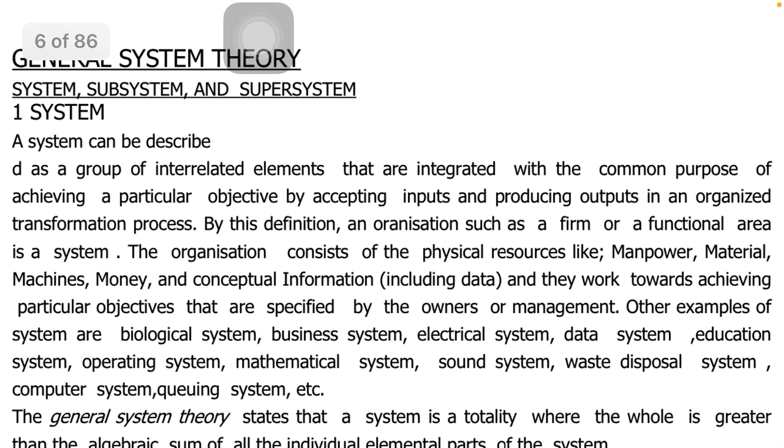Management Information System. We are talking about system here, so let's talk about the general system theory. We have types of system. I will describe them as we go on. We have systems, we have subsystems, and we have super system.

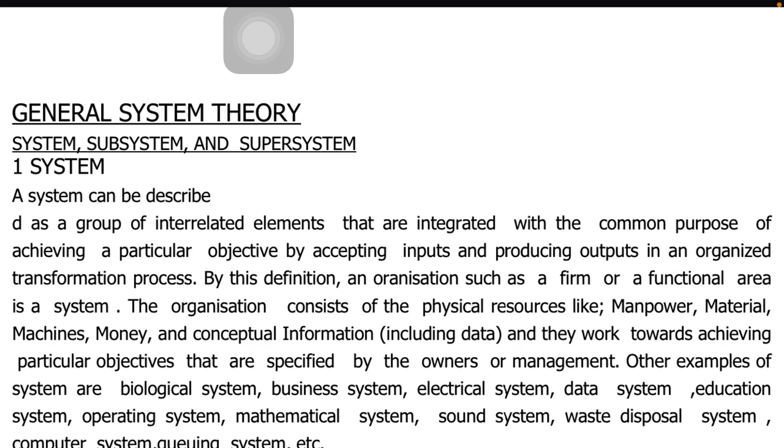System can be described as a group of interrelated elements that are integrated together with the common purpose of achieving a particular objective by accepting inputs and producing outputs in an organized transformation process. That means the input is worked on, processed, transformed, then the result is outputted.

Now, by definition, let me help you. A system is when you gather some elements together to work together to achieve a common goal.

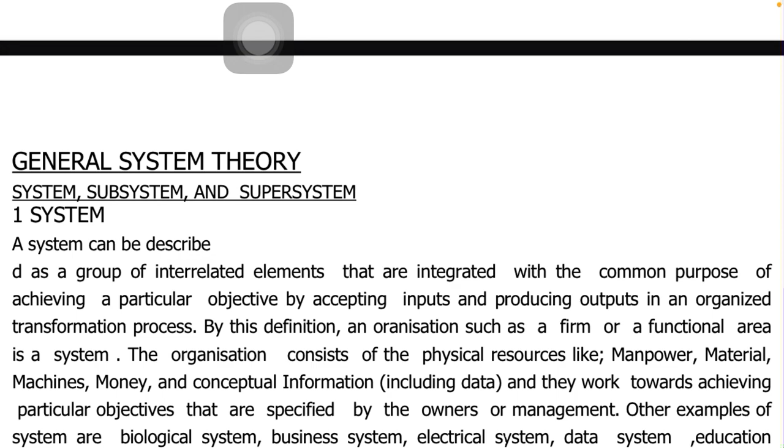A system, like an organization, can be called a system. A firm is a system consisting of physical resources like manpower, material, machines, money, and conceptual information. They work towards achieving a particular objective, cooperating together. That's a system. Each of the departments working together.

This one works on the information. This one has his own input on the information. This one checks the information. This one processes the information. This one presents the information. That's a system. All those departments, all those parts, all those elements working together.

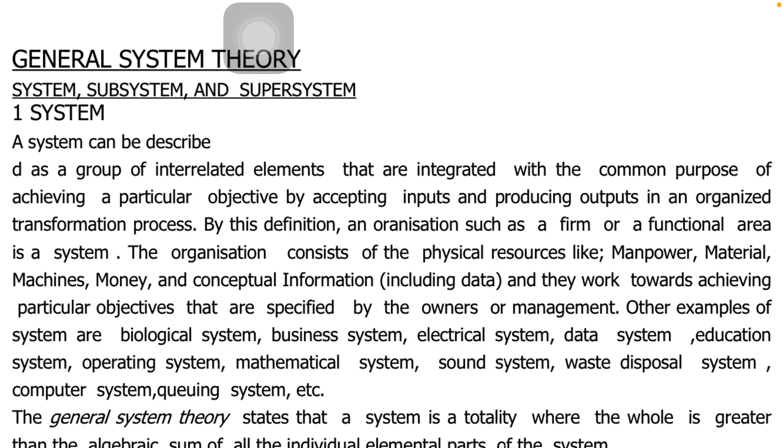Now we have types or examples of systems. We have biological system, business system, electrical system, data system, education system. We have operating system, mathematics system, sound system, waste disposal system. We have computer system and queuing system, among many other.

The general system theory states that a system is a totality where the whole is greater than the algebraic sum of all the individual elemental parts of the system. You understand that? A system is a totality, and the whole is greater than the algebraic sum of all the individual elements of that system. So individually you add them together, they are not still as good enough, but when they work as one, then they are the best.

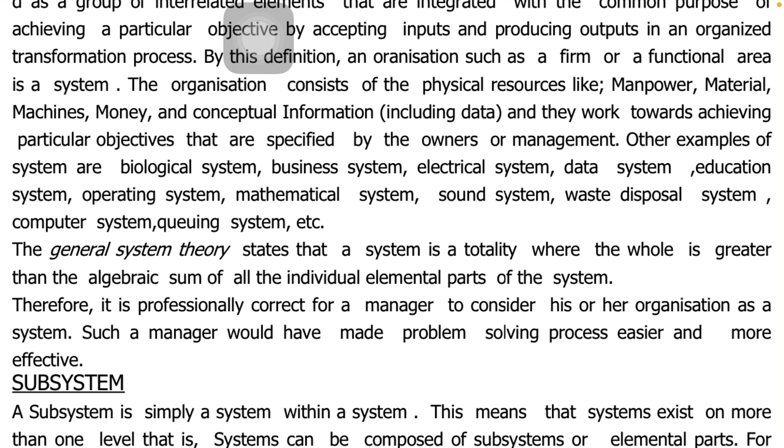Therefore, it is professionally correct for a manager to consider his or her organization as a system. Yes, consider it as a system, because a system is greater than the sum of all the elements in the system. It has more result, better result. So work as a system. Consider your organization as a system if you want the best result.

Now, such a manager will have made problem-solving process easier and more effective.

Let's go to subsystem. We have talked about system. Just briefly, a subsystem is a system inside a system. A subsystem is a system itself, but it exists inside another system. It has its own specific goal.

Say, this is what I want to achieve. It achieves it, and it gives the result. But there's another system that picks its result and uses its own result. So a system working for another system, a system inside a system, that's a subsystem.

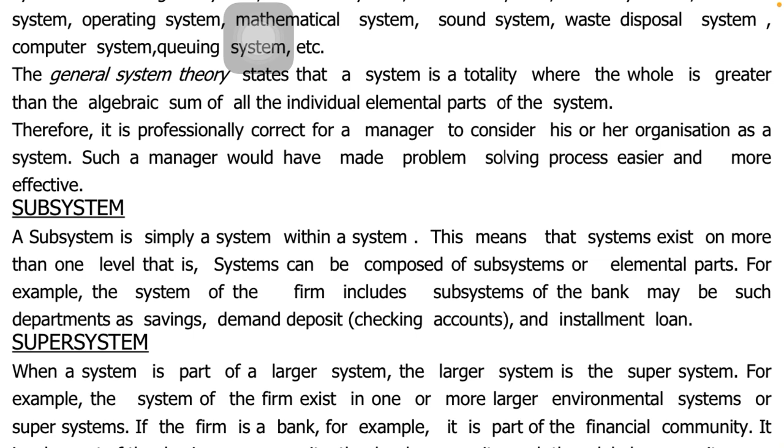Now a super system, you can read it through, please. A super system is a system that has a system inside it. This one has a subsystem inside it. Yes, a super system is the system that makes other systems work for it.

I would like you to give me examples. When you mention subsystem, give me examples. You describe super system, give me examples. You describe system itself, give me examples.

Now, basic element of systems. A basic configuration of system consists of the following elements. When you're talking about a system, you have need of input. There will be input element. There will be transformation process, and there will be output element. Yes, there will be input to that system, and there will be transformation processing in that system to give a result, and the result will be brought out as an output.

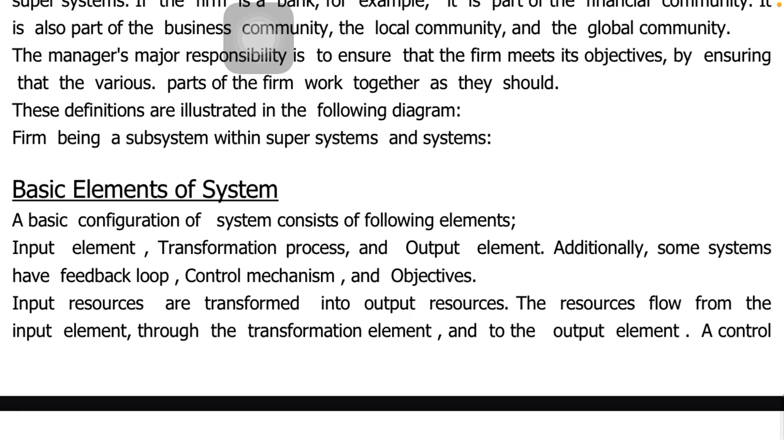So we have some systems that have feedback loops. They have control mechanism. They have objectives. Input resources are transformed into output resources by processing. The resources flow from the input element through the transformation element to process it. Then it will now go to the output element.

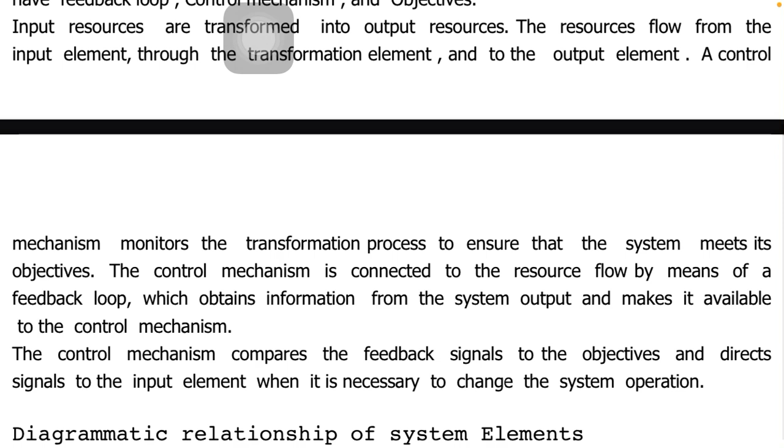Now, a control mechanism is one that regulates the transformation processes so that it will ensure that the system meets the objectives. A control mechanism is connected to the resources flow by means of a feedback loop, which obtains information from the system output and makes it available to the control mechanism.

Shall I explain that? You have a set target. In my system, this is what I want to achieve. You have a set target. So when you begin to produce, you now bring back a little of the output. You want to see whether it meets up with a standard. So the feedback, we bring it back to the control system.

The control system will compare. Is the output as good as the desired output, the set output? Is it as good as the objective? So when that is compared, if there is a little less, it will increase it. If there is too much, it will decrease it. Adjustment and correction will be done by the control system so that a perfect output can be obtained.

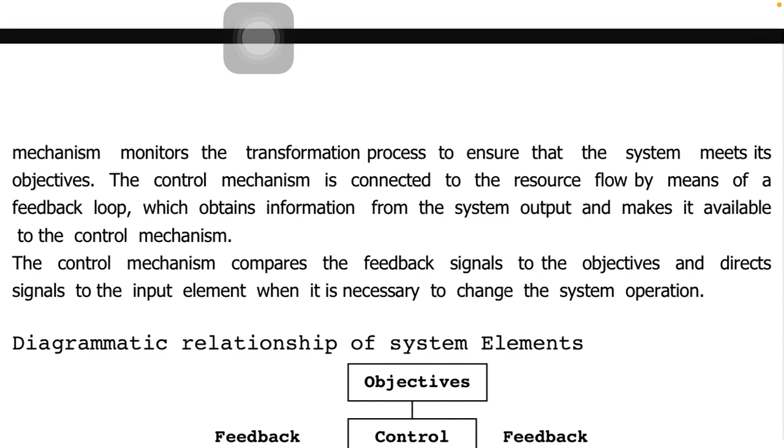So the control mechanism compares the feedback signal to the objectives and directs signal to the input element when it is necessary to change the system operation. Look at the diagram here. The objective is set.

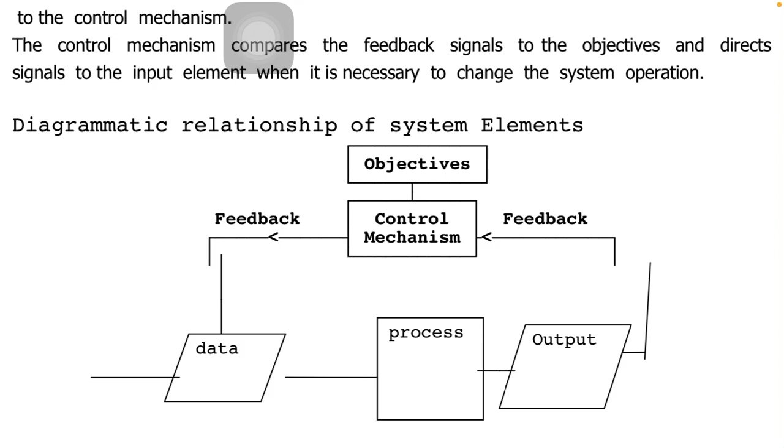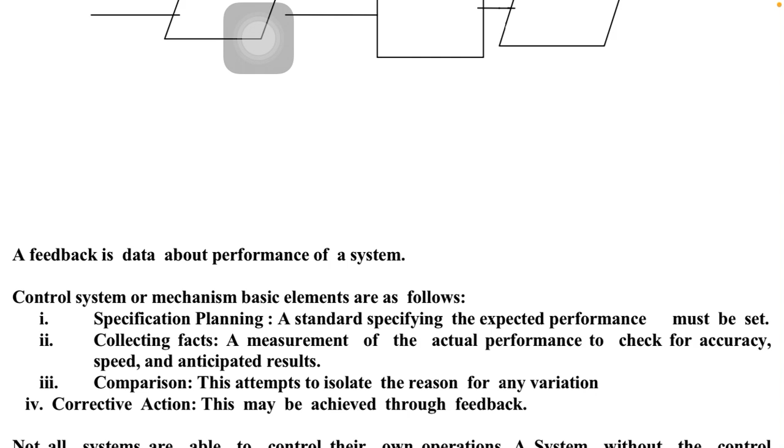The feedback is brought to the control system, which will now compare the feedback with the objectives and make necessary adjustments in the processing. A feedback is data about the performance of a system - how is the performance, how is the output.

Now these are the processes. Number one, specification planning. This is like you set objective - this is what we expect, this is what we target.

Number two, collecting facts. The fact will be collected from the output and brought to the control system. Number three, comparison. This will compare what is set with what has been produced for adjustment.

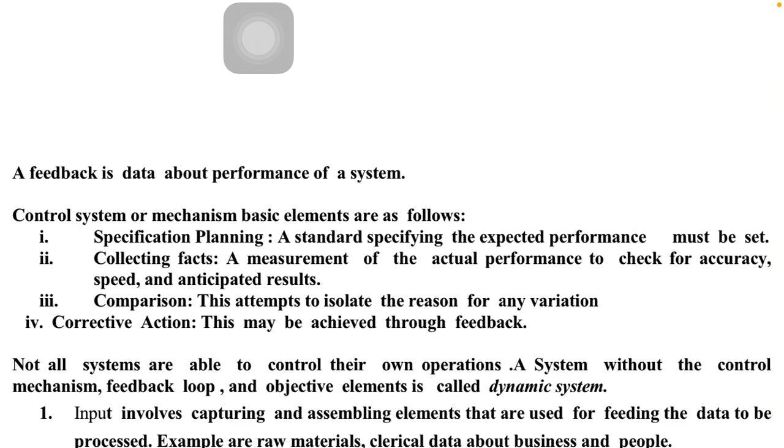Then number four, the adjustment, corrective action. All those things are what happens in a control system or mechanism.

Not all systems are able to control their own output, their own operations. A system without control mechanism, no feedback loop, no objective element - that system is known as dynamic system. No objective, no feedback, no control mechanism. It's dynamic.

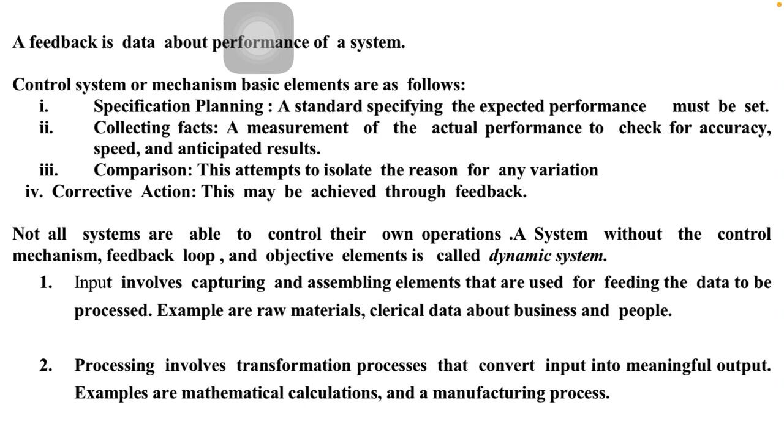When we talk about input, it involves capturing and assembling elements that are used for feeding the data to be processed. You see, when you have a system, something comes in before you start to process it - that's the input.

Number two, processing. When we talk about a system, you have need of input, then processing, which involves transformation processes that convert input into meaningful output. Give me examples - input, processing.

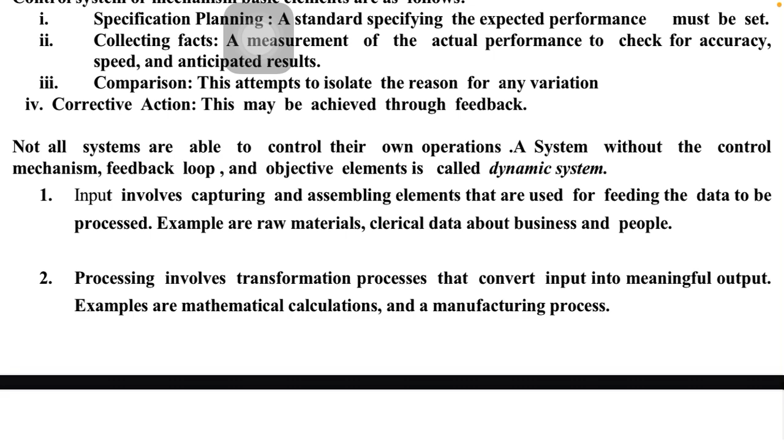Number three, output. This involves elements that communicate the results of processing to the outside world. This is all about communication - what has been received as input and has been processed has to be communicated to the outside world.

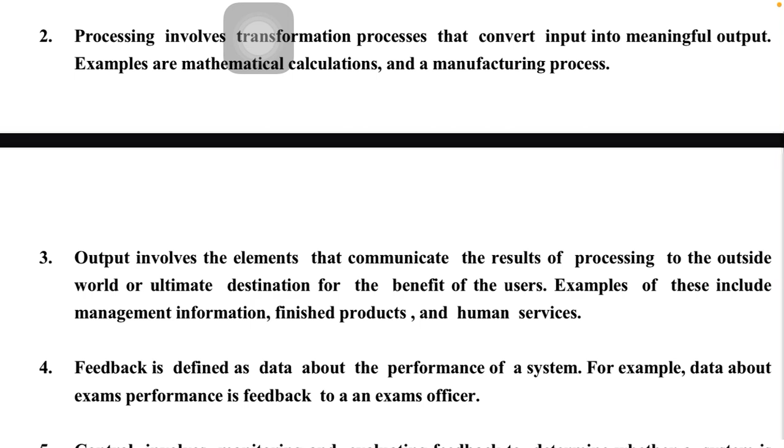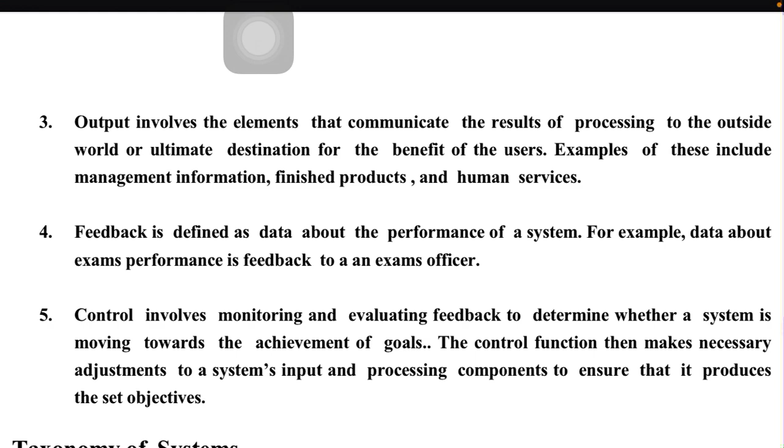Give me examples. Number four, feedback. For systems that have control, they have feedback and all that. Feedback is defined as data about the performance of a system. Also give me an example - look at the example there.

Number five, control. The control part involves monitoring, regulating and evaluating feedback to determine whether a system is moving towards achievement of goals. Yeah, control system.

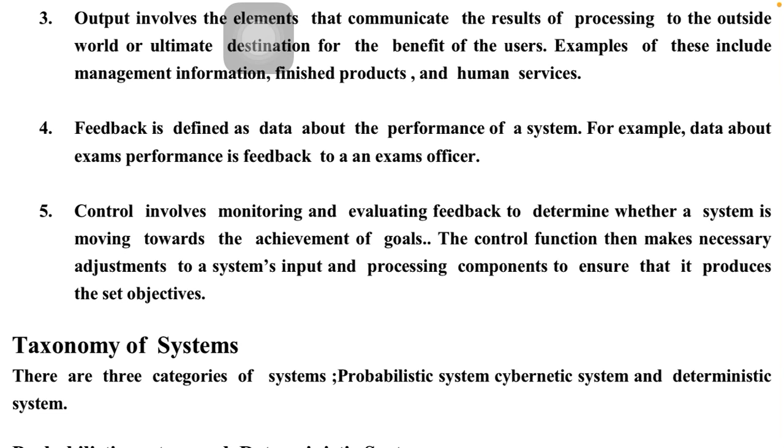All that. Let's go to taxonomy of systems. There are three categories of systems: we have probabilistic system, we have cybernetic system, and we have deterministic system.

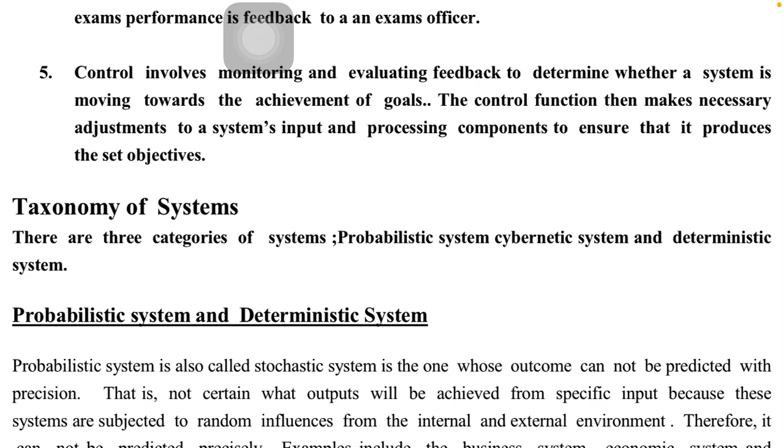Let's talk about the probabilistic and the deterministic systems. Probabilistic system can also be called stochastic system. This is the one whose outcome cannot be predicted with precision. When we talk about probability, it's under probability - you cannot predict the outcome.

You know why? There's a reason, and I want you to read the reason and tell me the reason. You cannot say this is what we are going to achieve, because they are subject to some influences. Then like the economy, you cannot predict the economy because you don't know what will happen tomorrow.

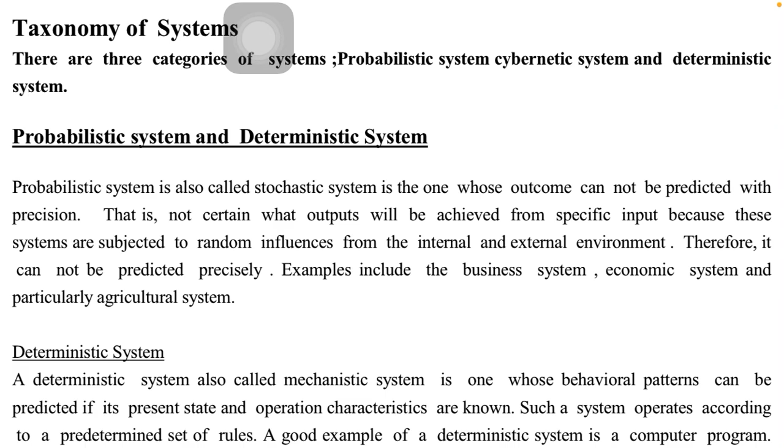The new government can come and increase fuel price - the economy is affected. So it's a probability whether what you have predicted will come to pass or not. It's a probability, like an agricultural system.

If you plant 3 seeds, maybe you are expecting three tubers from 3 seeds, but there is flood tomorrow. So flood will affect it, climate change will affect it, so you cannot actually predict accurately, precisely.

Let's talk about deterministic system. This is a system also called mechanistic system, whose behavioral pattern can be predicted if its present state and operation characteristics are known. You can predict the output here if you know the state and the operation characteristics.

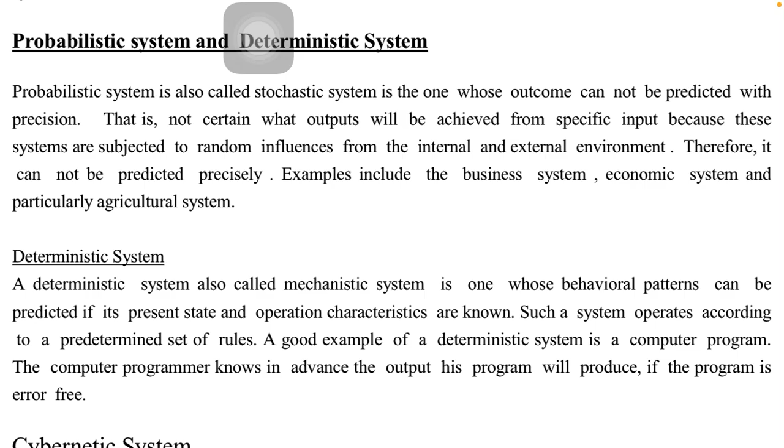Give me an example. A computer system - you know that you have kept a program there, the program is error free, then you can say yes it will give me this output. A computer system can do multiplication for you. As long as the computer system is in good condition, you can press a button and say 2 times 2, you get the accurate result. So that is deterministic system.

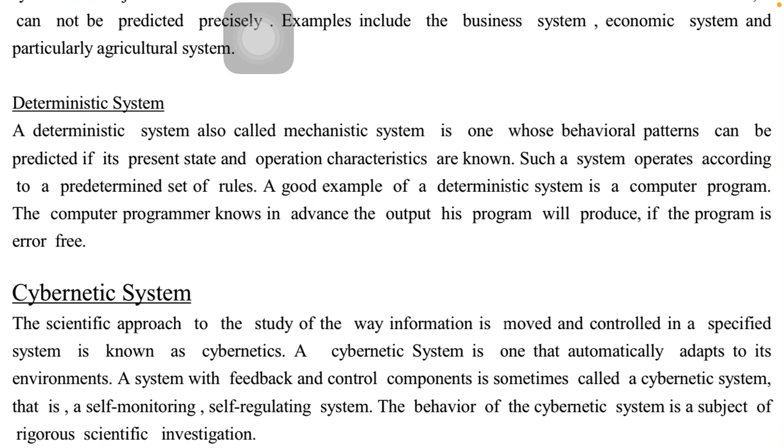Let's go to cybernetic system. Now it is also known as - a cybernetic system is one that automatically adapts to its environment. This one will automatically adapt to its environment.

Yes, a system with feedback and control is sometimes called cybernetic system - it will adapt. Like an air conditioner system, you can set your air conditioner system to a particular temperature. Say I want this room to be 22 degrees cold - let it be at 22 degrees Celsius. You set it to 22.

So the air condition system will try to perceive the temperature, then give out something to balance it, to drive it towards the set target. It adjusts itself. I don't have a better example right now, but that's the cybernetic system - it will adjust to get feedback from the surroundings and adjust. It's a self-monitoring, self-regulating system.

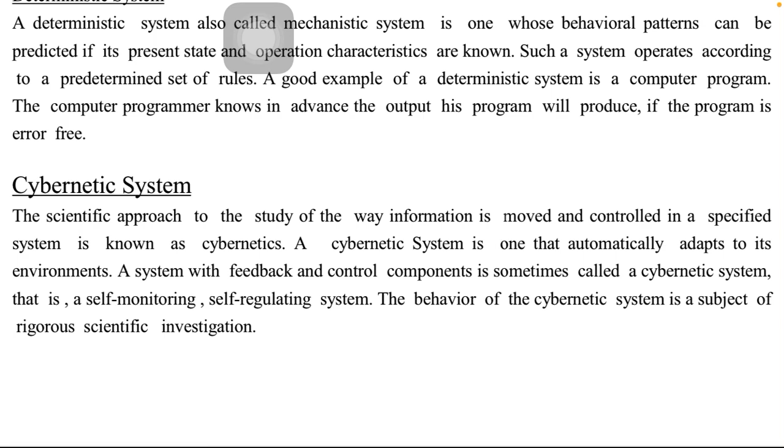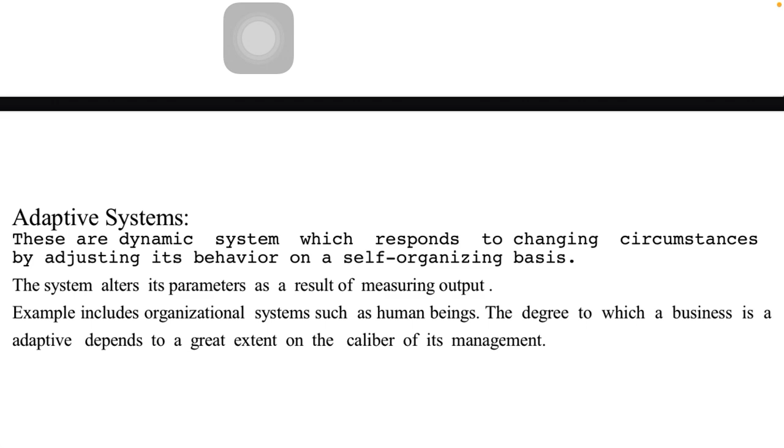The behavior of the cybernetic system is a subject of rigorous scientific investigation. Can we talk about one more? Adaptive systems - these are dynamic systems which respond to changing circumstances by adjusting their behavior on a self-organizing basis.

This is under cybernetic systems, but this one will respond by changing its behavior - just change its behavior. Maybe it's in Rome, it will change its behavior so that it can be like a Roman.

The system alters its parameters as a result of measuring output. Examples include organizational systems such as human beings. The degree to which a business is adaptive depends to a great extent on the caliber of its management. If they cannot adapt, that business will not succeed.

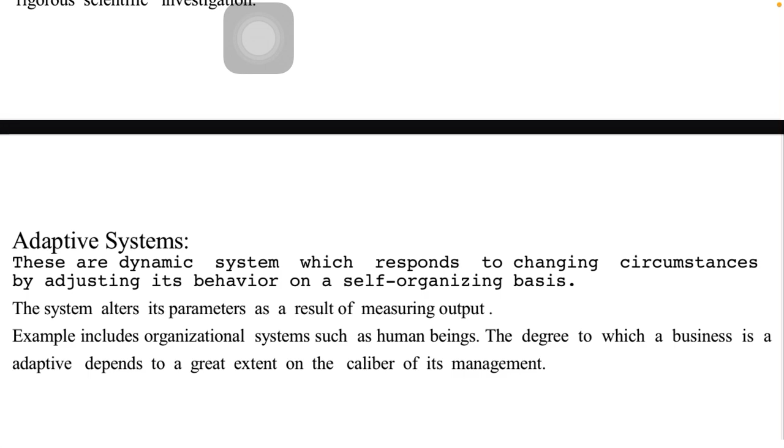And that's the end of week 1 for this system management, information management system.